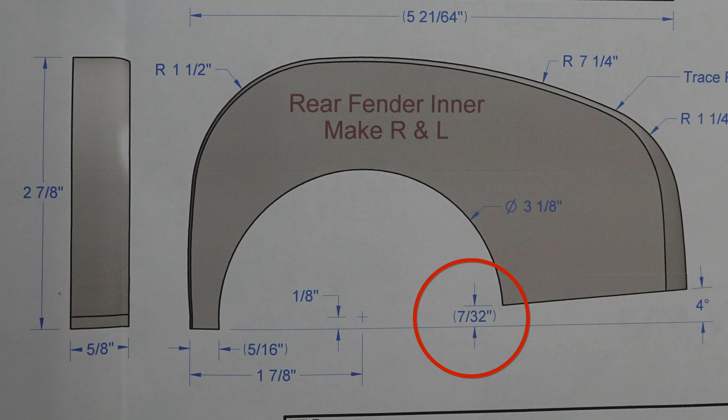So what I'm going to do is take this and double side tape these to the back end of each one of our fenders. Once we get that done, everything here now is square, it's flush, it's the way it should be. This piece here will be flush to our sanding table, and that will make all of our sanding from there right. It's not going to change the angles.

Once I get this done, guys, again, just like the original fenders, the front fenders, I cannot tell you how to shape this. This, for me, is all freehand sanding.

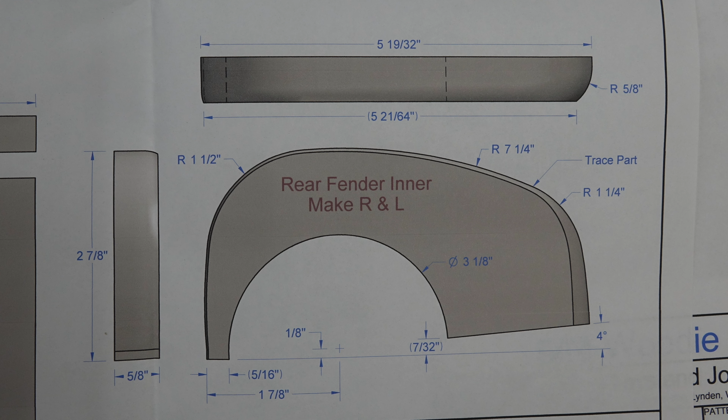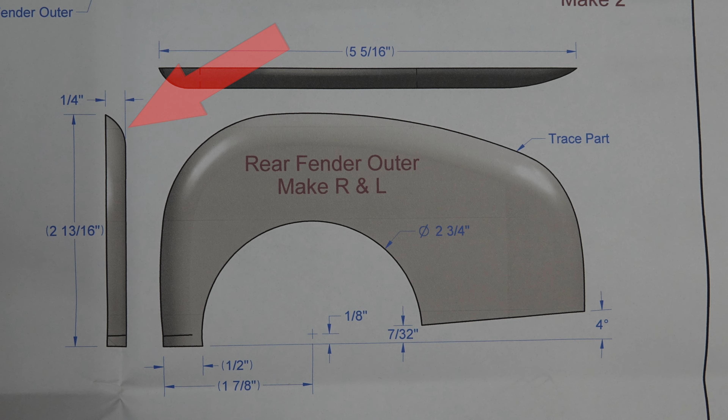We can see here on the intersection of the rear fender, we have a 5/8 radius here, but on the outside fender, it really tapers into that 5/8 radius. On the front end of the inner fender, there's hardly any radius at all, but on the outer fender at the front, there is quite a sharp radius, as well as, looking from the front, quite the radius on the outside edge. So for me, this is all freehand sanding.

I'm going to be doing it over at the belt sander, and then once the belt sanding is done and I get the initial shaping, that's when all the hand sanding comes into play.

The one thing I'm going to caution you about, guys, is do not change your profile here at the back. That sharp, crisp line that we have there, do not alter that. That is very important for when we do the trim of the body panel.

So I'm going to get these shaped up, and then I'm going to show you what they look like once they're done. All right, and if you take your time, you should end up with something that looks like these.

And of course, if we take one of our panels, this will eventually sit here on our panel just like that. And you can see how great that's going to look once we get that done.

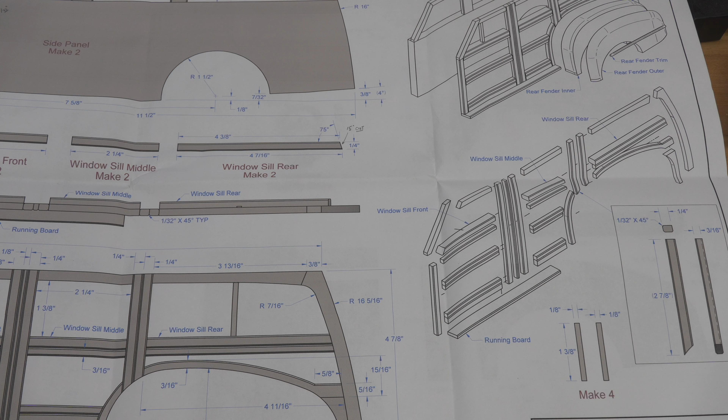But now we need this trim that's around here. And for some reason, and I don't know what that reason is, Toys and Joys has decided to make this fender frame, I guess we'll call it, all in separate pieces.

I want to do something different. I think that is nothing but a headache. So let me show you what I have in mind.

I have photocopied our pattern, which is this whole assembly, our separate pieces, 1, 2, 3, 4 separate pieces. I've taken the pattern and placed it on a piece of hardboard, making sure that I allowed for this height here, this 7/32 of an inch from the base of our panel up to where our 4-degree taper starts.

Guys, what I'm going to do is take this over to the scroll saw and cut it around the outside perimeter, right across this line and right down this line here. And then I'll show you what to do from that point. And what we end up with is this.

Now, guys, we want to do this all in one shot. So I have some 3/16 inch thick poplar that I've milled out here, and I'm going to place it up against our straight edge, place our template here up against our straight edge, and we're going to trace this around.

Oh, I see I have not sanded that one edge. I'm going to do that first. So we're going to trace all the way around here after I sand that up, and we're going to cut one of these each for both our left, and then we'll flip this over, and our right fenders.

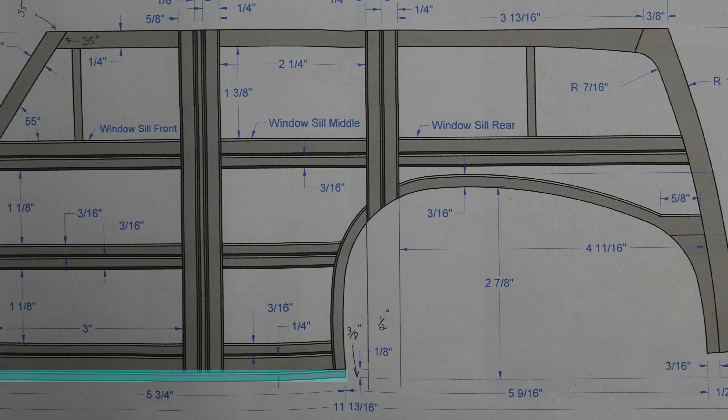Now guys, I feel like I may have misled you a little bit here. I said that we need the mark 7/32 up from the bottom, and that is sort of true, except that's not how it works with this, because here on the drawing we can see I forgot about our running board, and our fenders actually get mounted flush with the bottom of our running board, which means that our fender needs to be down 1/8 of an inch.

So you put the mark on this side for that 4-degree taper at 3/32 of an inch, and this side of our fender, the thinner side, is actually going to hang down below it by 1/8 of an inch. And then you end up with something like this, and you can trace around it. And then we get our trim, our 3/16 trim all the way around.

So there's still a little more to do with this. And the next thing we do actually is I need to take this over to the table saw. Well, at this point, I need to transfer some lines onto my piece.

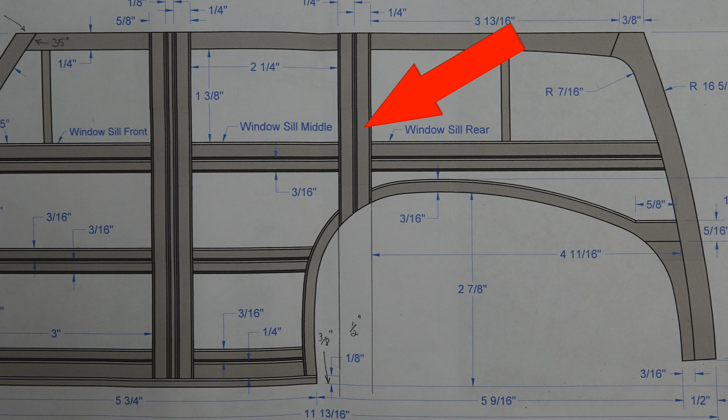And we can see here on the drawing, guys, as I've said before many times, these are your drawings. Don't be afraid to mark them up and add notes. So for this piece up here, I have extended its outer lines all the way down to the bottom and taken some measurements, and I have transferred those lines onto one of my blanks.

Guys, all I'm going to do here is I'm going to set the stop on my fence, and I want to cut out—because we have this square edge here, we can still do it. We haven't cut our taper. So I want to cut out this middle section.

You just want to make sure that your table saw blade is on the right side of the cut so that we get the right size here. And effectively what that will do is take out this middle piece here so that we can add our upright into this curve. So I'm going to take this over, set my stops, and get these ones cut.

Well, hopefully you noticed that when cutting the spaces here for the uprights, I did not cut them right through, and there's a reason for that. So what I've done is I have milled the stock 1/2 inch wide. I've made it extra long. This is for the uprights that are just at the back of the rear doors.

You can see them here on the drawing. So what we're going to do is I've done that 1/16 routing in the middle to give that illusion that it's more than one piece.

And with these slots now, I'm going to glue these in place just like that. We're going to glue them in place, and we are going to let that completely set up and do nothing else with it until those are dry.

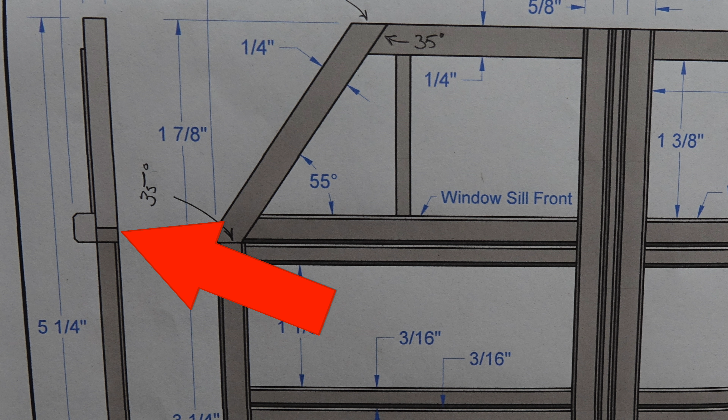Okay, so we have these pieces done. It's all careful glue ups, but I want to make one little correction. Earlier, I said that I was not going to glue in the windowsills because they would protrude, and that would be the case if the drawing showed the entire thickness of the panel, but what I was going by was this little detail here, and that detail actually is just these trim pieces we're cutting right now, which is only 3/16 of an inch thick. So actually, that windowsill does not protrude. It actually sits a little bit shy because we have 3/16 on our trim and then a 1/4 inch thick for our panel. The entire thickness of our windowsills is 3/8 of an inch. So it's actually raised up on the inside a 1/16 of an inch because it sits flush with our outer trim here. Sorry about that, but anybody can misinterpret plans once in a while.

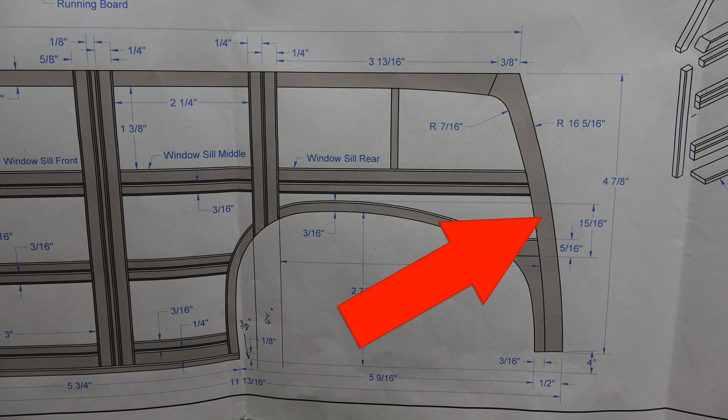Okay, so what we're going to do now is make these pieces right here, which would be the top sill over the back window, as well as this back panel piece. Now guys, this might be a bit of a tricky piece, but just like we did with the other pieces, I've made a photocopy of the pattern, and we are going to cut this using a template. Simple as that. We're going to mark it out, make sure that our template fits well with our model, and then we will make left and right sides for these, dry fit them in place, and once we're happy with it, we will glue them in place.

Now guys, this top 3/16 trim, I have actually cut this to be just a little bit proud of each one of these profiles because I want to sand afterwards to get that fine fitting. I already have a bit of an issue here, I noticed something shifted and this doesn't line up perfectly. So let's get these top trim pieces made for the back end of our Woodie Wagon, and then I'll show you what it looks like when we get that done.

Okay, and those are those pieces cut. Now, I did point out how I had that discrepancy, something shifted. So all I've done to compensate for that is I have extended the inside of that piece. I don't know if you can see that.

There, it'll go like that, and that'll fill in that gap where something slid. And it doesn't change anything in the model because the outside is still the same.

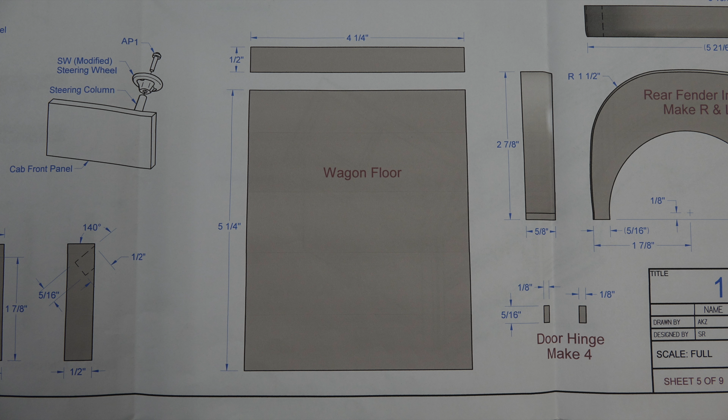The next pieces I want to make are this wagon floor and the cab front panel. I don't think we need a video of the wagon floor — I've just milled some 1/2 inch thick cherry, cut to 4 1/4 wide and 5 1/4 long, just like it states in the plans.

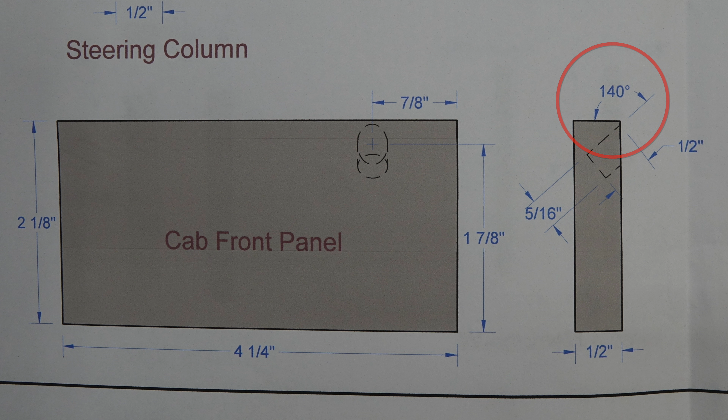For this cab front panel, it's the same dimension, 4 1/4 inches wide, 2 1/8 inches long, but it has this angled hole. We can see it says the hole is 140 degrees, so whether you measure it or do the math, that turns out to be tilting your drill press at 40 degrees. But what if you don't want to tilt your drill press?

So here's what I've done: I have my cherry, marked and center punched our hole right where it states on the plans, and I've cut this piece of scrap pine at 40 degrees. I'm going to use some double-sided tape, place this right here, make sure it's nice and secure — double-sided tape to this 40-degree angle. I've marked here on the side which way our hole has to go, and I'll drill this hole over at the drill press using a 5/16 diameter center point bit.

I didn't quite have a good enough hold on that piece, and the bit did bite a little and caused some damage, but I was able to sand it out. I almost drilled it on the wrong side, but I caught that when double checking.

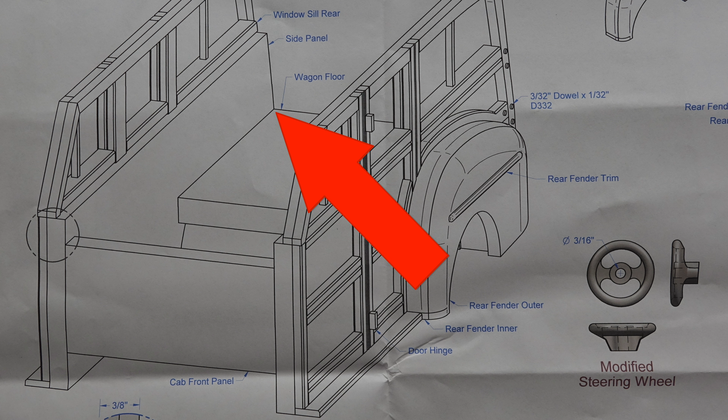Now I want to glue in our cab front panel and our wagon floor. Looking at the drawing, the cab front panel is mounted flush with the front end of both side panels. We can also see our wagon floor is at the very back of our side panel. It looks even, but nowhere else in the drawing does it show those two panels and where they go.

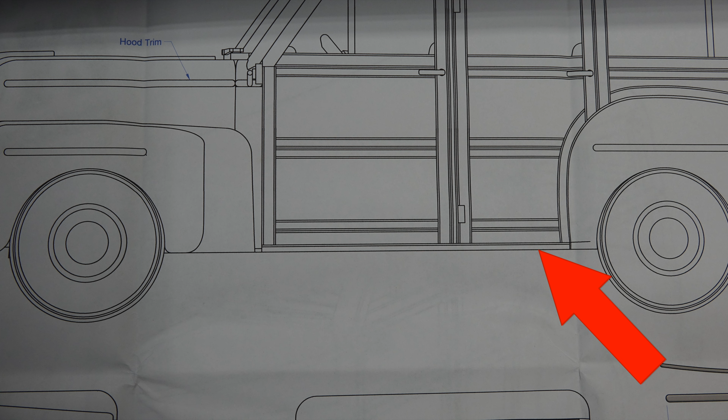So I'm going to go on some assumptions here. Looking at the general views drawing, our front side panel, our hood, and the bottom of our fenders line up with the bottom of our side panels. That lines up, when we sit it here on our model, with the bottom of our chassis. So if our side panels line up with the bottom of our fenders and hood assembly, and the hood assembly lines up with the bottom of our chassis, that would mean the side panels also have to align with the bottom of our chassis — but it doesn't state that anywhere.

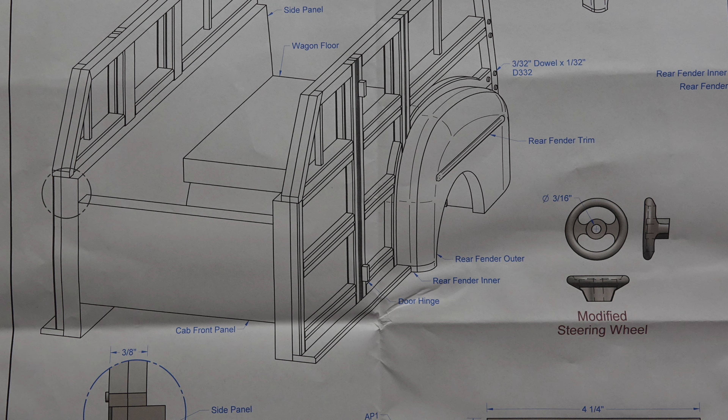I'm also under the assumption that this front panel here, this gap we see from the bottom of our side panels up to the bottom of our cab front panel, is the same thickness as our chassis, and that 1/2 inch panel actually slides right in here, between this piece we put in and the 1/2 inch gap we put in for this front chassis.

So you can do the measurements and play around all you want, but I've already done the measurements, so I'll just tell you. From the flat surface at the bottom, which will be the bottom of the running boards if you've already installed those, it is 1.25 inches up for this back panel to get mounted.

That 1.25 inches up will be the bottom of this panel, and it will get glued in place so that it is flush with these back curves of our rear profile. The front piece, our front cab panel, is going to get raised up 3/4 inch and glued in flush with the front edge of both of our side panels.

Now guys, I'm going to give you a bit of advice here. While this thing is clamped together and nothing is set yet, before that glue gets a chance to really set into that stock, you really, really want to check it for square. Make sure everything across the front here is square and lining up the way you want it, because once you get this glued together, you don't get a second chance.